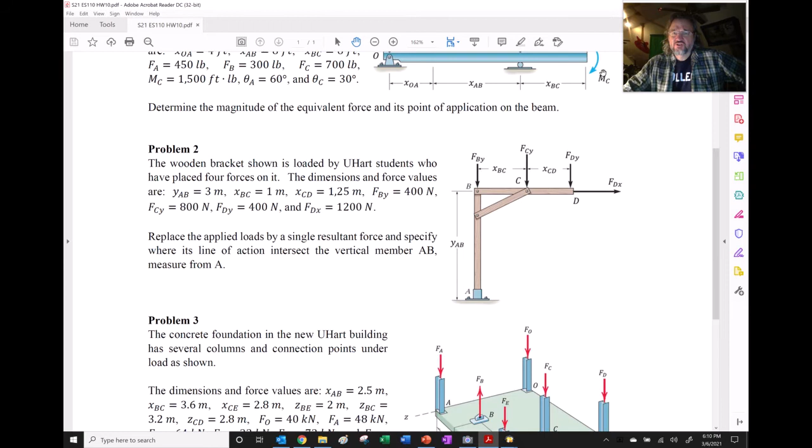So there's going to be some force. Obviously it's going... well, I'm pointing the wrong direction because I'm flipped over. It's going to go that way, pointing towards D, and it's going to be downwards. So it's going to be coming this way, downwards right there. Somewhere we need to adjust where it's going to be crossing the y AB in order to create that moment.

Let's try to do this one right here. So I need a fresh sheet of paper. Here we go. Problem 2.

Focus. Focus, focus. See, focus. In focus. You're not going to focus. There you go. All right. Dr. Diehl needs to focus.

S21, ES110, and this is homework 10. Problem 2.

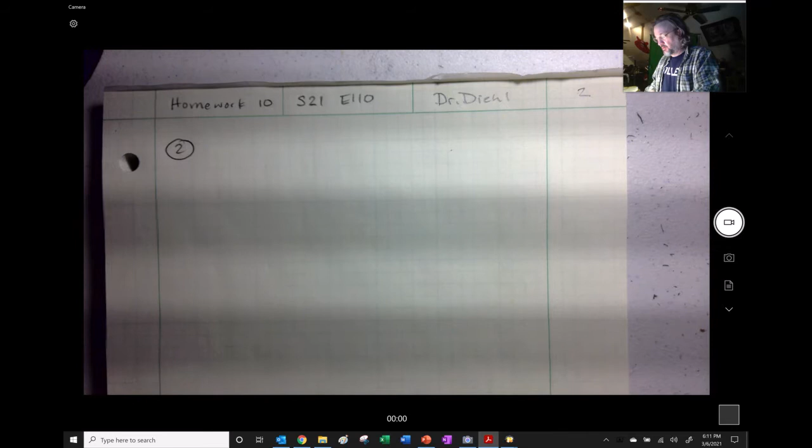And we will draw our problem out. Oh, I didn't really quite make that horizontal, but it's all right.

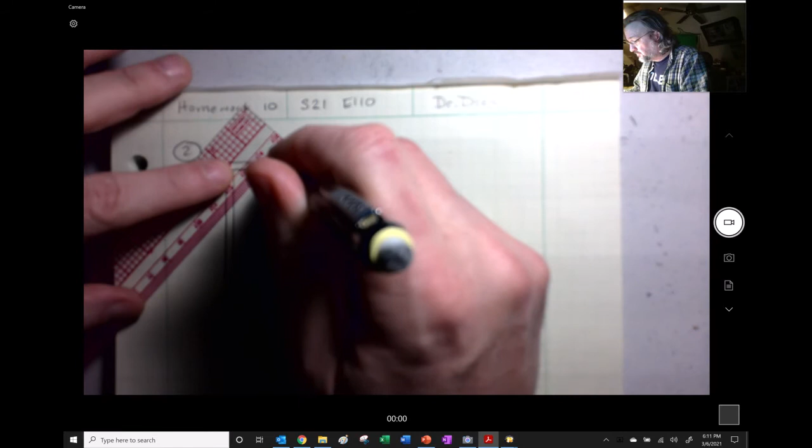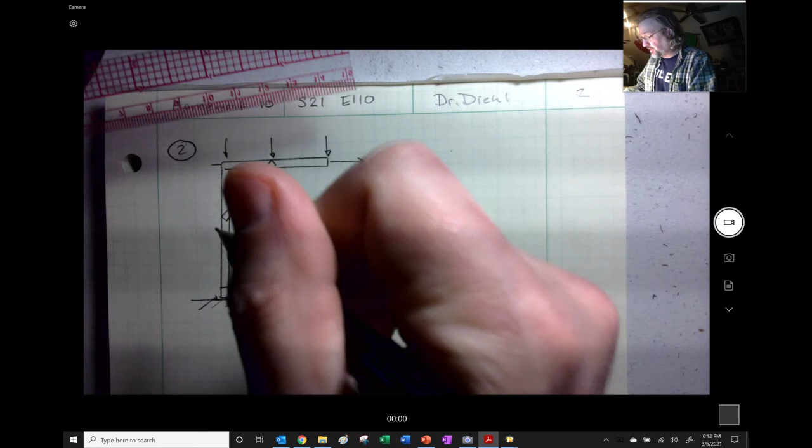Okay, so we'll place our forces on here. Force coming right that way, and then we have this dimension here, and here's where this thing is attached to the ground, attached to some bolts. This is A, this is B, C is right there, and I have D over there. So this is F DY, F DX, F CY, and F BY.

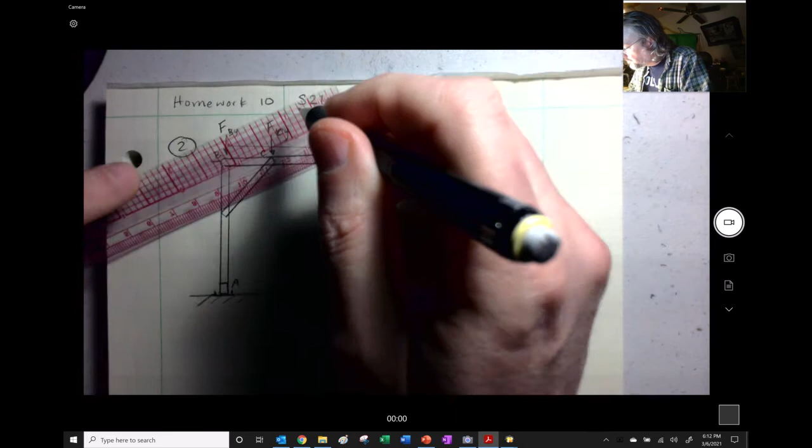Let me see, I'll make a... oh, that was a terrible line. Well, 100 minutes to mess that up so badly. I must be kind of tired or something.

Well, I spent a lot of time today talking and recording, so kind of burned out. I should go play some guitar. That made me feel better. Should record a song for you in the middle of one of these things, see if anybody actually pays attention to them.

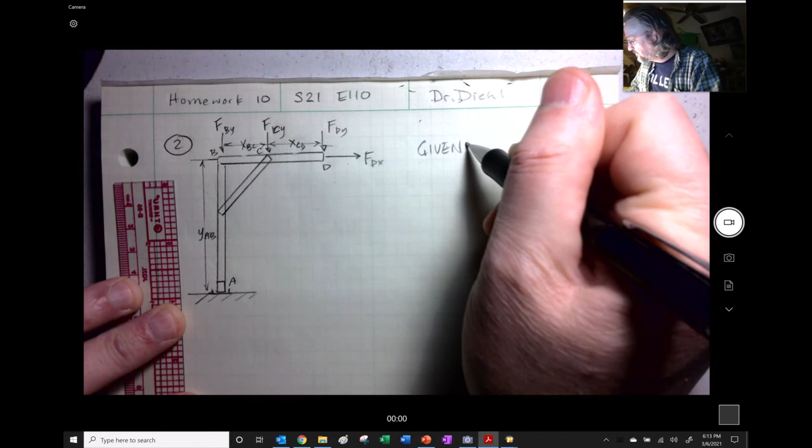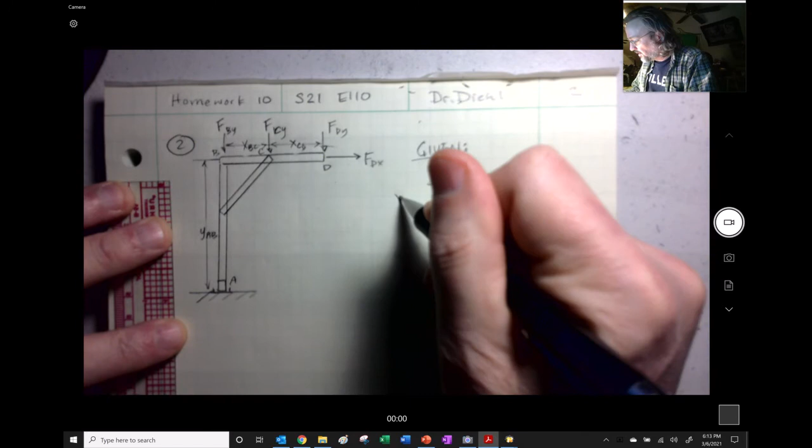X BC and X CD. Here's our given. So we're going to start with y AB is 3 meters. X BC is equal to 1 meter. X CD is equal to 1.25 meters.

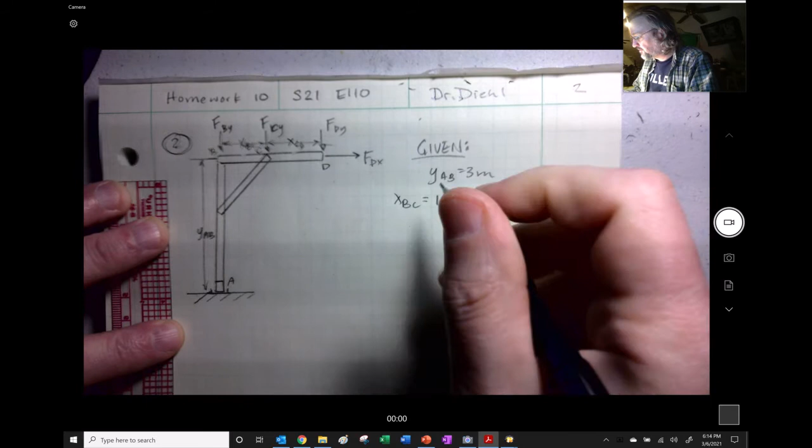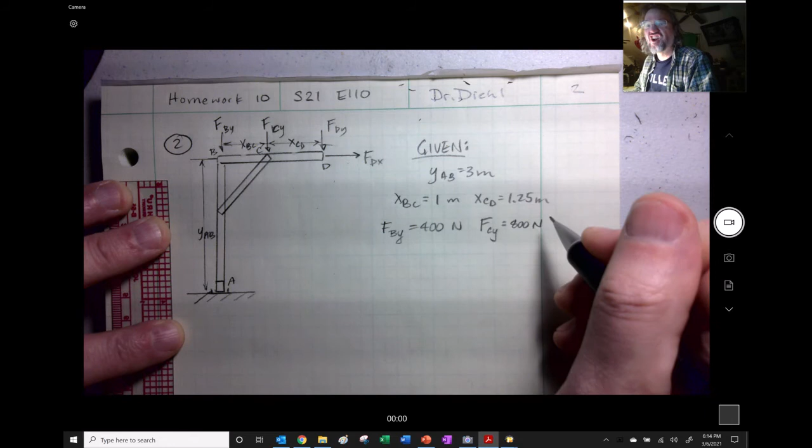The forces: F BY is 400 newtons, F CY is 800 newtons. There's a nice face I made, right? Like that. F DY is 400 newtons, and then F DX is 1200 newtons.

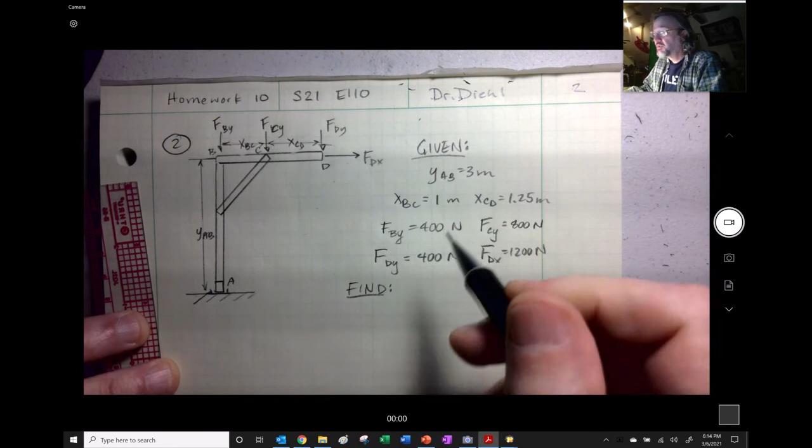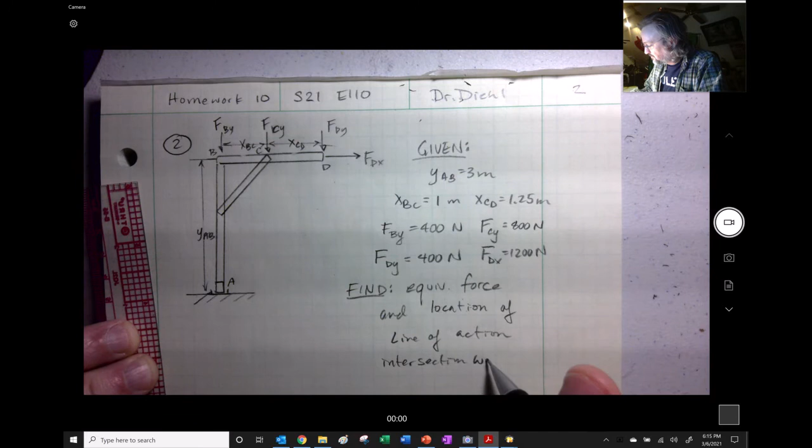Okay, so we're going to find the equivalent force and location of the line of action intersection. This is way too long. Intersection with AB. Okay, that's a lot of words. You should just write the whole thing down exactly as it's stated, right?

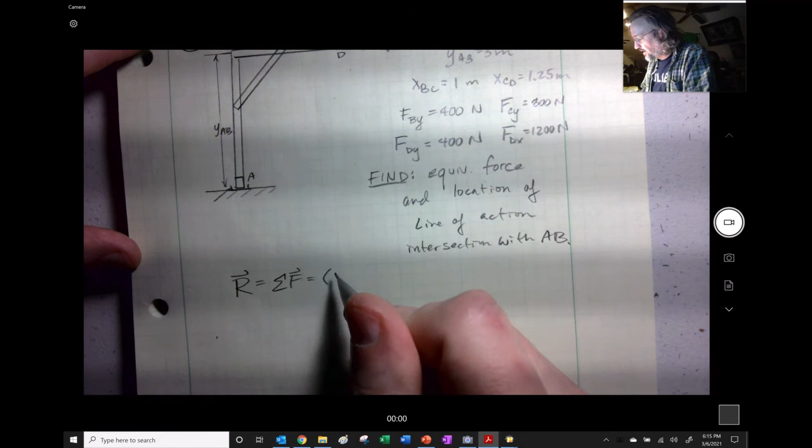Otherwise, but all right. So what I'm going to do here, let me find the resultant. That's just the sum of the forces right here. So that's easy enough, right? In the x direction, that's going to be 1200 newtons, obviously. And then here is just going to be 400 plus 800 plus 400 — could have done that in our heads — that should be 1600, right? So here you go. This is going to be 1200 i plus 1600 j newtons.

But now we want to find what the moment is going to be, so we need to figure out whereabouts on this thing that the moment needs to land. I'm thinking about this as I'm doing it, trying to remember how I'm supposed to proceed, if there's any kind of slick little trick. I don't think so.

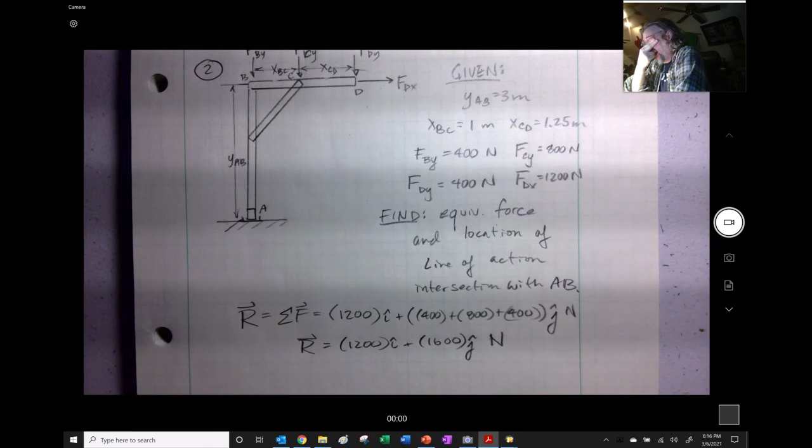I could overcomplicate this, but let me see. Let me figure out what the moment about A is going to be.

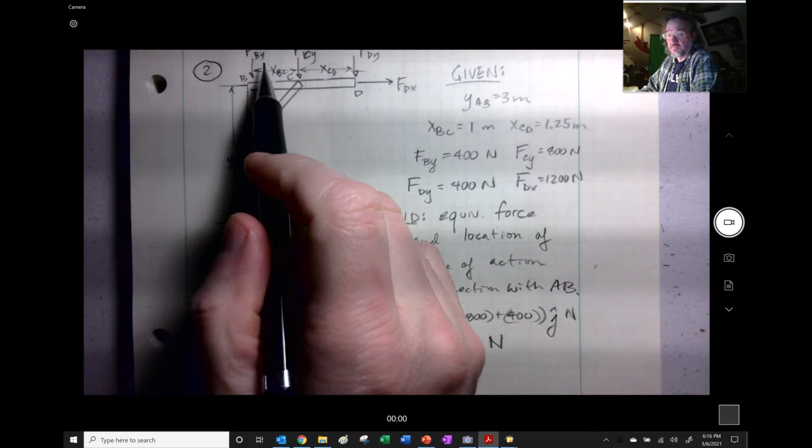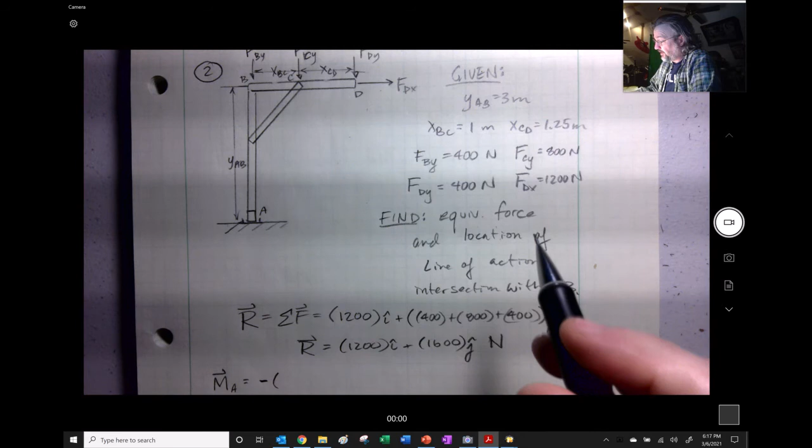All right, so FBY doesn't do anything. FCY, right? So that's going to be, and these are all going to be negative. So this is going to be FCY, the 800, times the XBC, which we see as 1 meter.

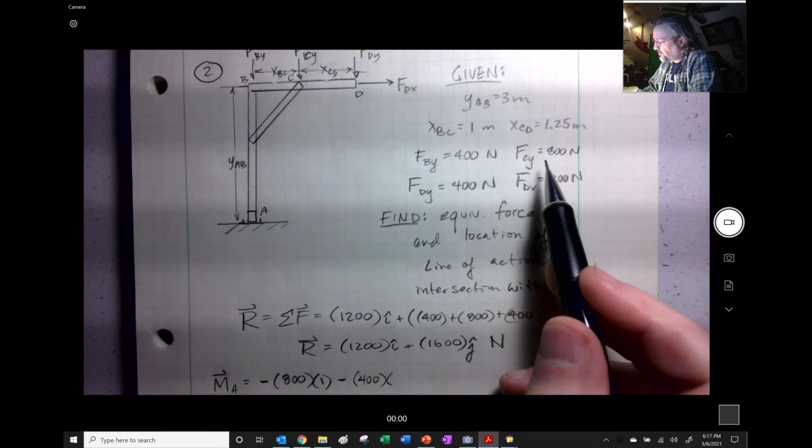That means FDY, that's also going clockwise, and that's 400, times XBC plus XCD, so what is that, 2.25. And then this guy right here, he's also clockwise, and he's 1200, multiplied by that 3 right there.

So if we take all of those - let me use my phone, put the calculator over here, and turn it back on - 800, 400, 2.25 times, plus 1200 times 3, could have done that in my head, and there we go, negative

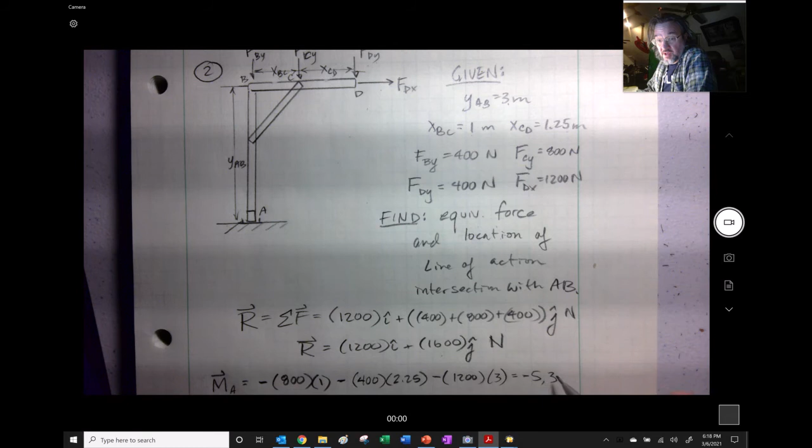5,300 Newton meters, right? So now we got to try to figure out where on this thing we would need the 5,300 Newton meters.

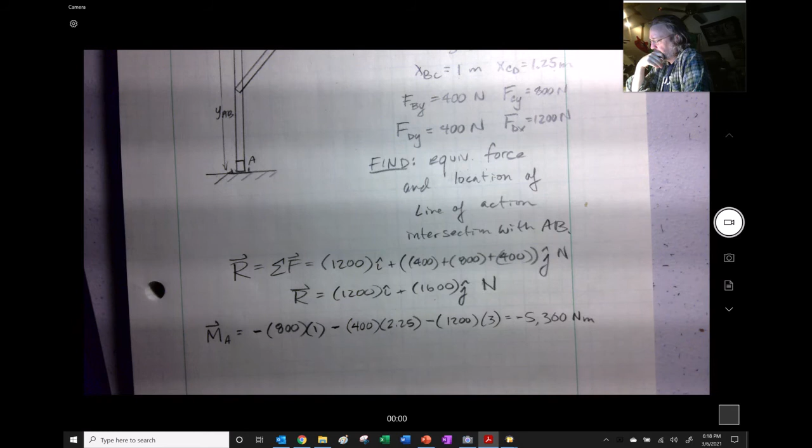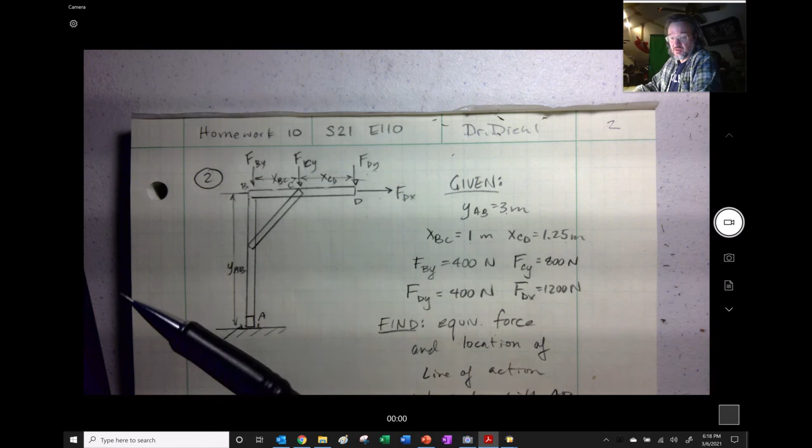I would say that it's only the stuff in the x direction, right? So what we would essentially want to do is find this location, right? That's going to be something like this right here. It's going to be up and down.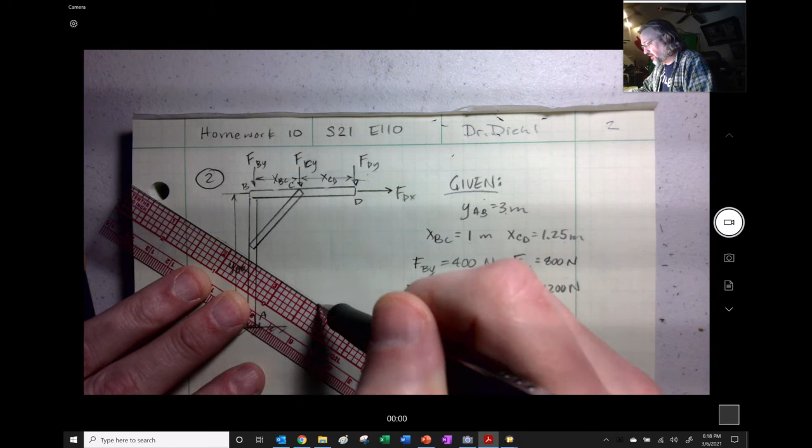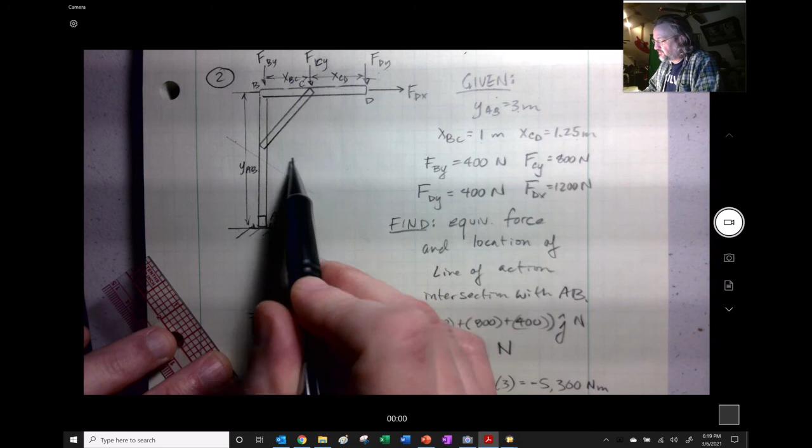I think what we would want to do is know that the force is going to be something like along those lines right there. It's nearly 45 degrees. It's going to be something along here. I say it's only the x direction that's going to cause this 5,300 right here.

So let me see. I'm going to say that my Y from A right here, Y from A to the force of the thing is going to be this over here divided by the Y that's right in there. That's my guess. And then I'm going to go look and see if I'm remembering this correctly.

So 5,300 divided by my 1,200. And I just said that wrong - this was the x. Dummy. This was the x. Yeah. Right.

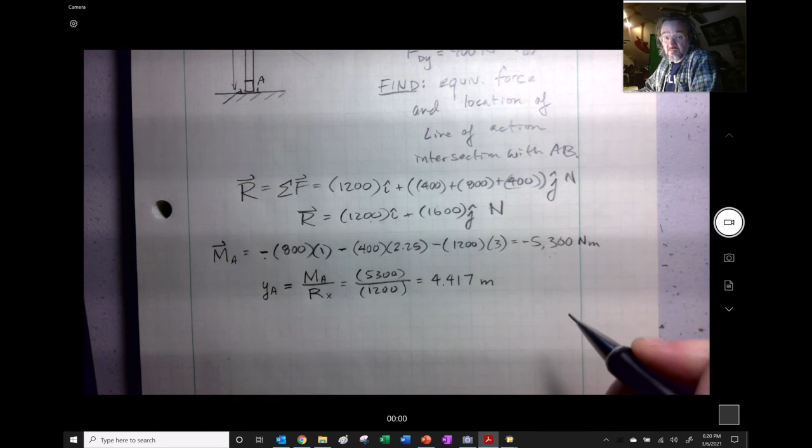So we're going to find that's going to be 4.417 meters, right there. So that's where that force is going to be taken right there.

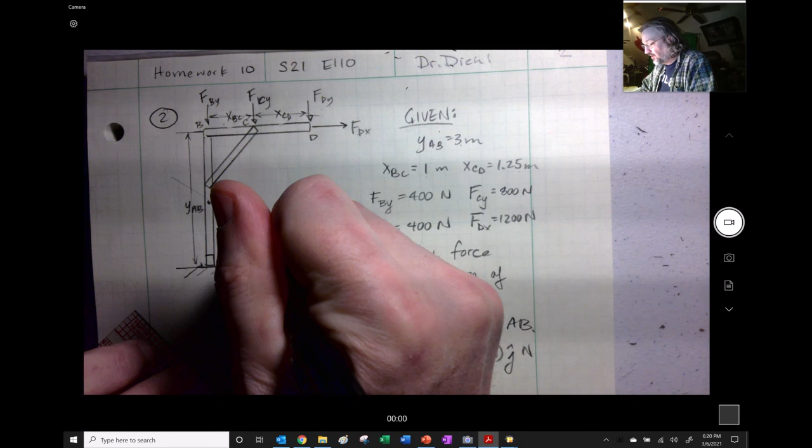I'm going to say we're going to find this resultant is going to be right here, and it's going to be located at - I didn't do a good job of dimensioning this out - like this YAR. I just invented that YAR. So I don't know what to call it. This is what I think the answer should be, right?

That we say R, the resultant of this thing, is going to be 1,200 I, because this Y is going to be straight up and down. It's not going to be doing anything in here.

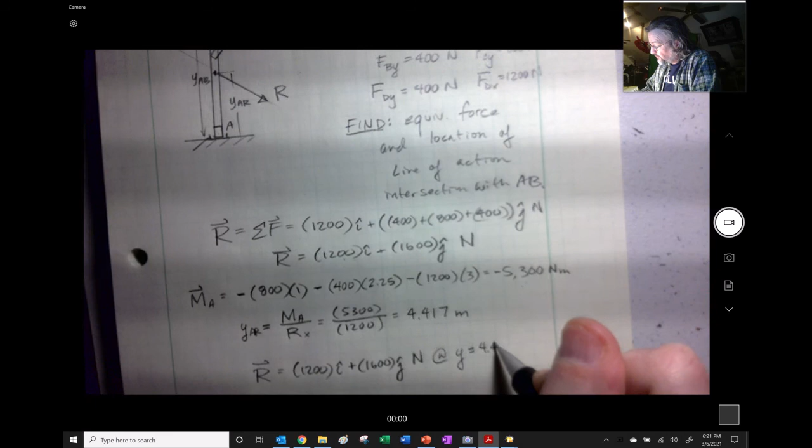My wife is returning. I can see that. At Y equals 4.417 above A. So that's my answer. And I'm sticking to it.

But maybe I want to look it up, and of course I didn't get this out of a book, so I'm not going to be able to find the answer for sure. But yeah, I think that's the answer. That's the one we're sticking with. So we're done.